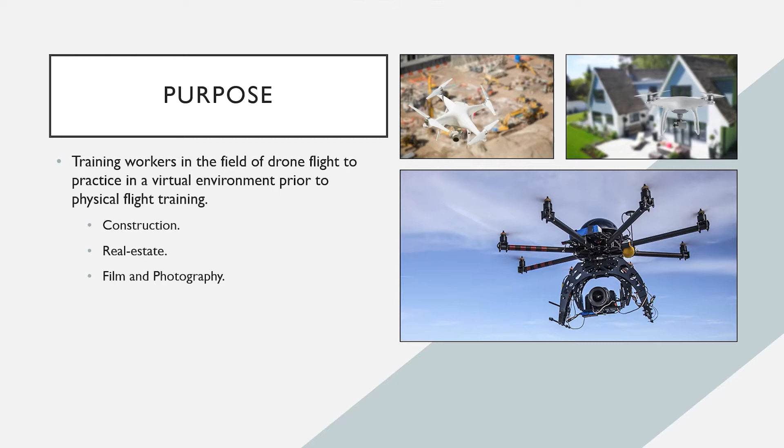So I developed the simulator within the Unity 3D physics engine. It's 100% physics-based, the drone. I wanted to make sure that it was programmed to be 100% physics-based, meaning within the engine there's no animation, no vector translations, it's not moving across coordinates through some type of system. It's using simulated forces and torque within the program itself. With that comes great results that happen on their own because it is all quote-unquote natural.

Having the drone move forward makes it lean forward as well, just as it would with a real-life drone, very minute, leaning back, same thing. This allows for things like front flips and back flips to happen naturally. You can see in the little GIF that the drone does this, and that wasn't something programmed into it specifically - that's just a result of it being physics-based.

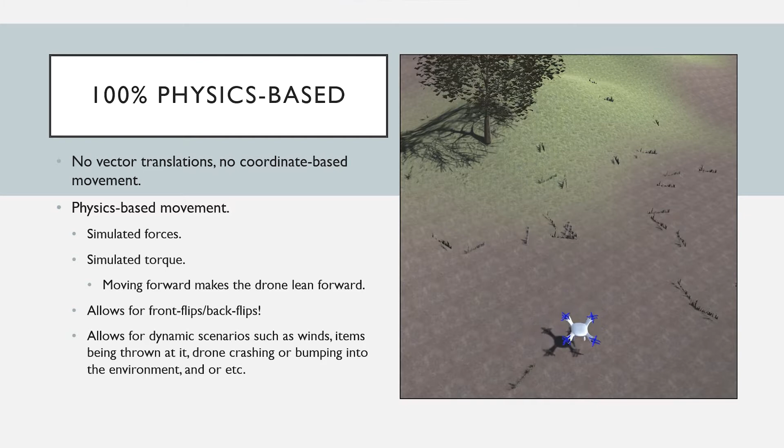It being physics-based allows for future dynamic scenarios such as wind forces. You could throw an item at it and it would react to it, get hit and get jerked and all that. It can crash, it bumps into the environment and such, and that brings us to the collision of the drone.

It can completely land, it can hit things, it can fall and crash, just as you would need in a simulator to show error. I wanted to make sure that the colliders for the drone weren't too intense, because physics simulators usually do require simplicity as much as you can optimize it to be. So there are 4 sphere colliders on the propellers, and 1 box collider on the main body of the drone, as you can tell in the photos. But there's the drone again, just trying to land and then falls off the roof.

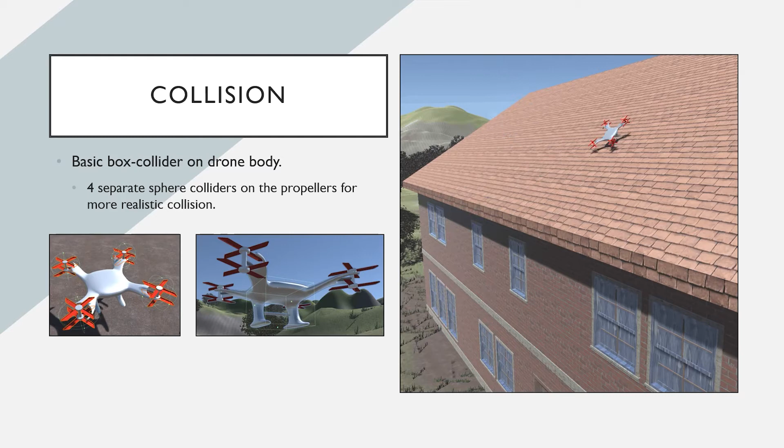And that brings us to self-balancing. That was an extremely important mechanic that was necessary for the training, because a majority of most modern drones, such as DJI and Phantom, have self-balancing in them. And it just makes it a more immersive experience, a more realistic simulator.

So though wind forces aren't implemented right now, that's something that should come down the line. This would combat that, and when you do lean, it catches itself, it's able to restabilize itself. The basic method is right there, like in the photo.

If we were to say that the drone was leaning one way, the program detects which propellers are leaning, and then compares it to the other opposite side of the drone and sees, okay, the front left and back left propellers are not at the same height as the front right and back right propellers. We need to counter that with some type of torque force.

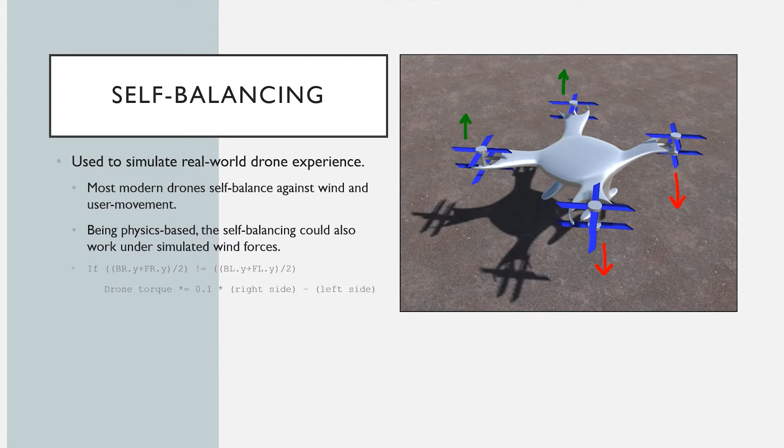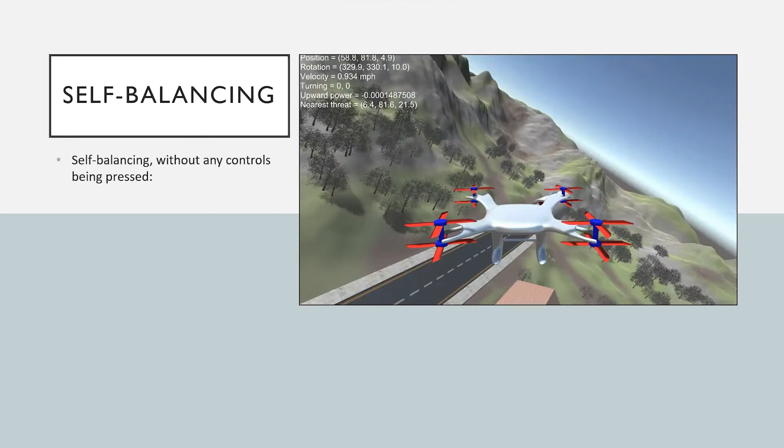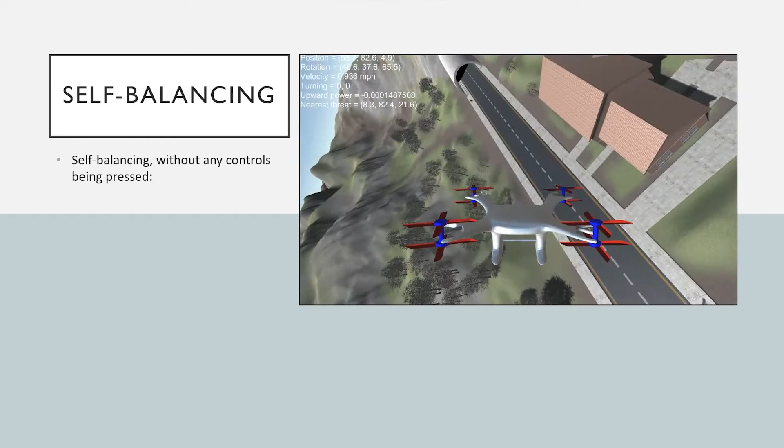So here's an example of the self-balancing, and this is without any buttons being pressed. This is completely letting go of the drone and it catching itself by itself, dynamically. You can see in the logs I added to the screen of the simulator, you can see all the calculations. It checks the rotation, position, velocity, and catches itself, bringing the velocity down. The upward power shows what the user is pushing down, and right there it's at 0 to show that the drone is just completely catching itself on its own.

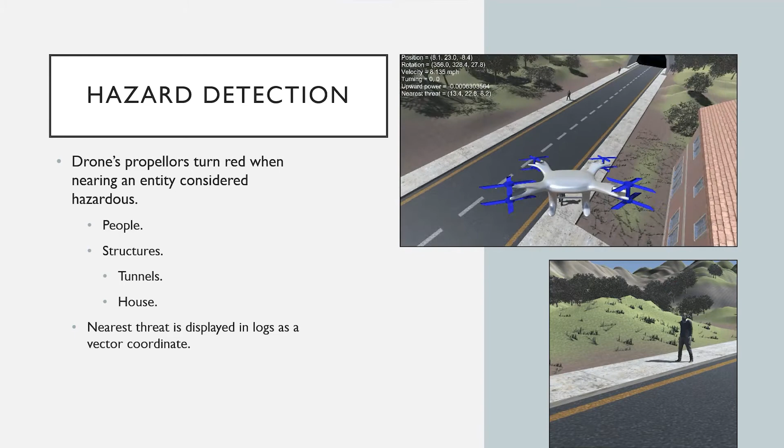And with that, if you saw in the logs, there's also nearest threat, which brings us to our next slide: hazard detection. So for a training simulator, you need to show how to learn, how to train yourself. With that, we have hazard detection, and hazards in the simulator are people, structures, and in the simulator that would be tunnels and the house. When the drone or the user gets too close to a hazard, the propellers become red to show you that you're too close to some type of entity. Back up, try to avoid whatever that may be.

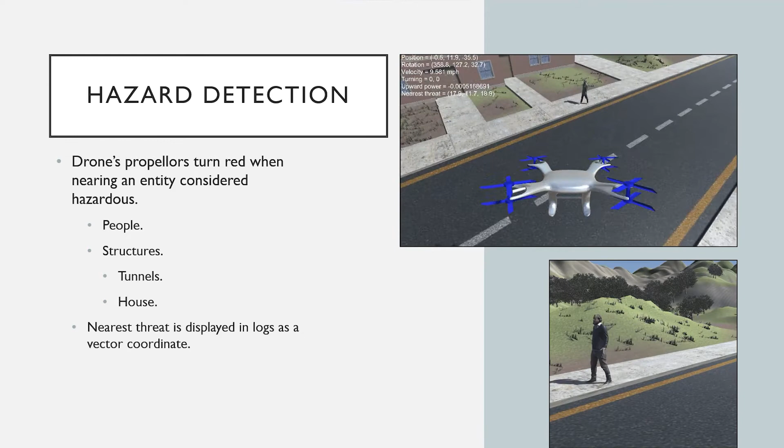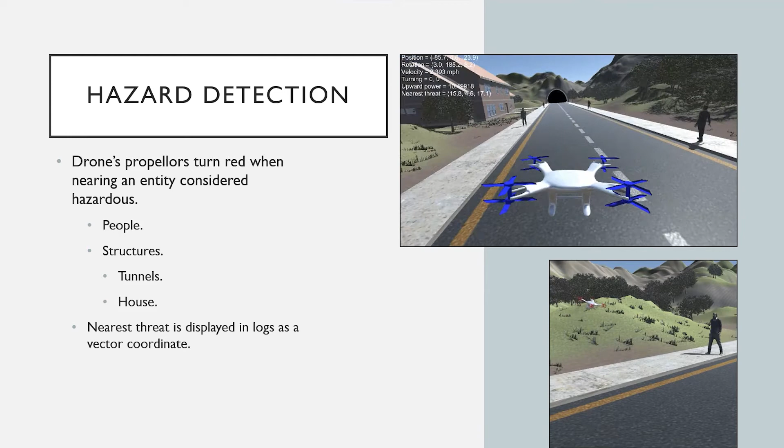You can see that in the logs as well. It says the nearest threat is at a certain distance. It finds the nearest threat in an array of threats, finds the closest one, and tells you how far away you are from it using a vector. As you can see, it gets closer and closer and the numbers go down.

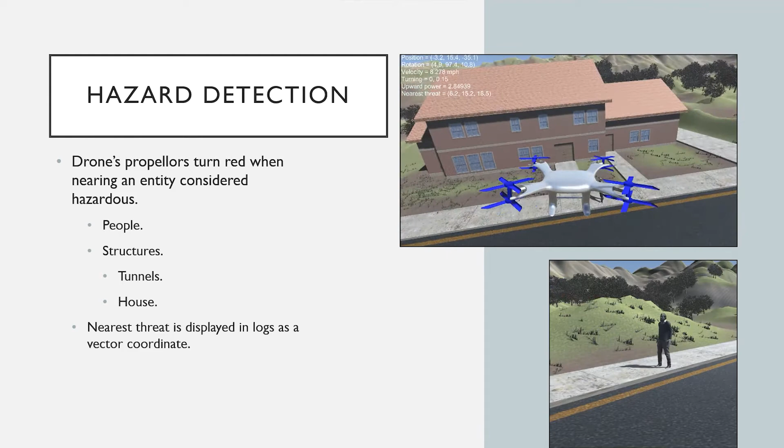With the people, I thought this would be funny. I wanted to show how the people are randomly generated. This is just an exaggerated visual to show them. I promise they're not self-aware, to my knowledge. The characters are randomly chosen, so you have a better immersive random experience. You don't have the exact same linear experience every single time.

They come out every 10 to 30 seconds, but this is every 5 to 10 seconds in this case, just to show it. This would also be implemented for vehicles and other things such as maybe birds or other types of animals in the future. This is, I would say, relatively early development, and so I want to have more road hazards like vehicles, wind forces, just more detail in general. I want to make sure though to keep it optimized.

Trees, those trees in the simulator were a lot of work. When you're close, they're much more detailed, and when they're super far away, they just disappear, just so it doesn't bring down the frame rate of the simulation.

Different training difficulties, that would be great. That's something I'll be working on real soon. Tasks and challenges, of course, this is a simulator. This is for jobs, we're not doing it just to fly around in a drone. This requires some type of task that maybe could be done.

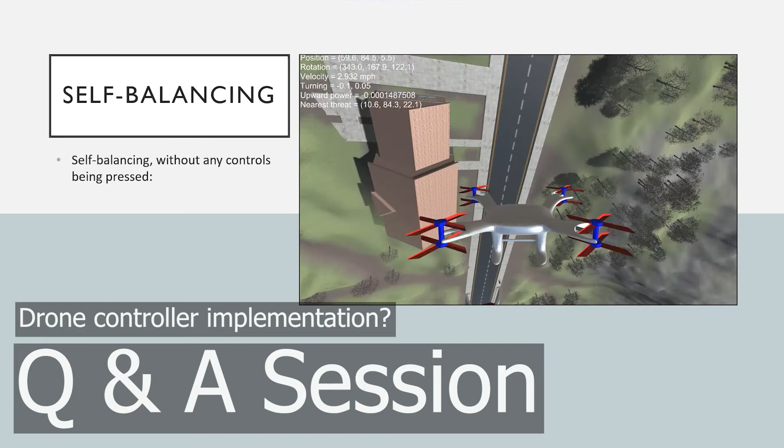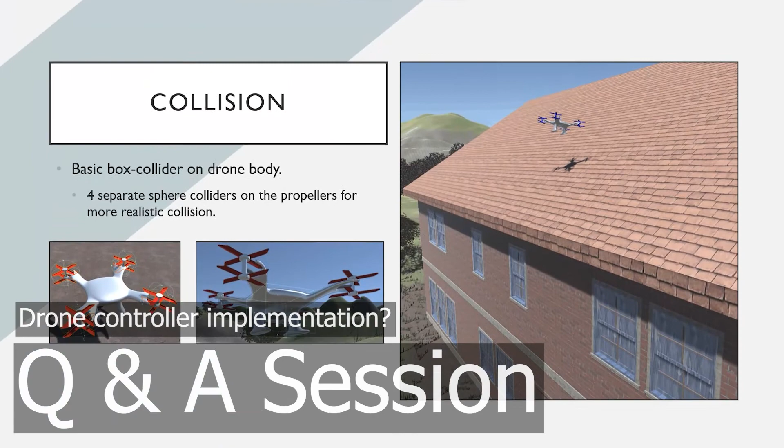What I wanted to ask, can you include a real remote to steer that? Yeah, if you're talking about an actual drone controller. Yes, an RF remote. I think they have USB these days, and you can hook them to the computer. Yeah, that was the next step we wanted to take, to real soon implement an actual controller. I have a Phantom drone in my closet, so I'll be able to possibly set that up real soon. That's definitely one of the nearest next steps.

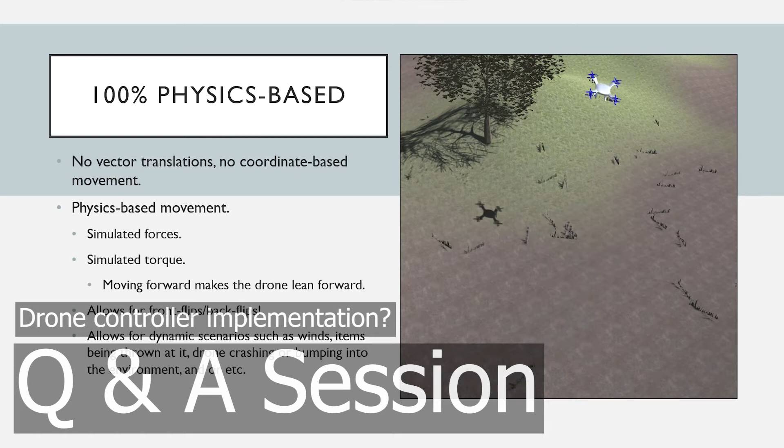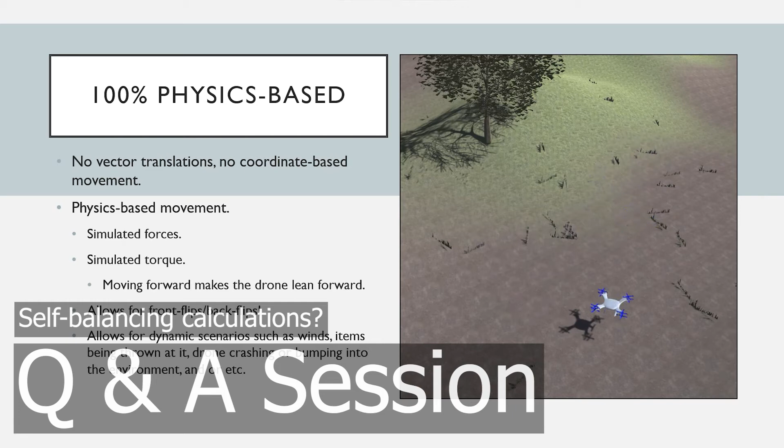Actually, the self-balancing, did you have to write the feedback type controller to get it to self-balance, or was there a library or something like that? I wouldn't consider, I don't think it was exactly a library that I got from anywhere. It was really, I guess I could say it's built in within Unity itself.

It will tell you the y-axis coordinates of the propellers, and that's how I detect it, like I was saying, it'll detect if the y-axis on a certain side of the drone is higher than the other. So now you know that the drone is not balanced.

So it counters that with a torque force to counter that. It does 1% or 10% of the right and left side difference, and then that's multiplied to the torque of the drone. It's kind of funny how I say that, because obviously you can't just add torque, but that's how you do it in the physics engine. You can just change the velocity and the torque of the drone, and even though that might not be exactly how it would work in real life, you definitely get a very realistic result.

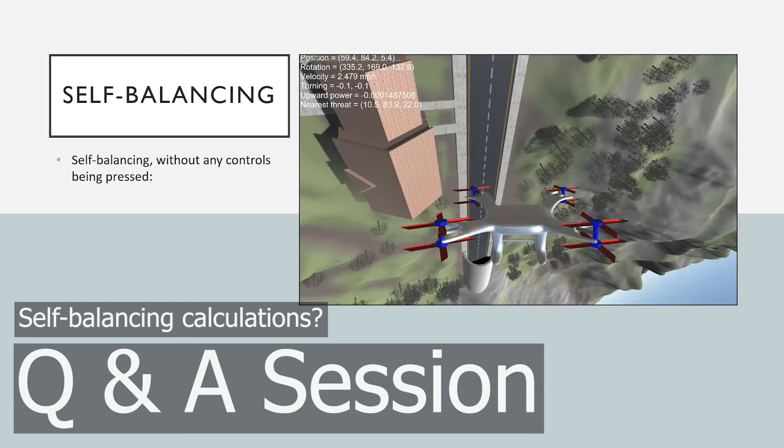It definitely feels like there's some type of mechanic within the drone that's making it self-balance. A better way could be to put upward forces on the propellers themselves, but instead the actual drone body is having the torque modified. Normally that's a very difficult area, because if you put too much torque and overcompensate, you actually increase the oscillations.

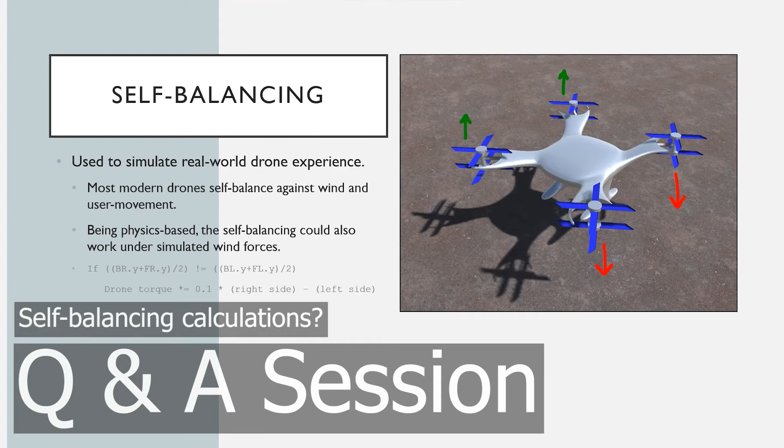Yeah, that was something I did have to deal with, because it would just start to get worse and worse, more intense every single time it tried to rebalance itself. So that's why it only does 10% of the difference, because it would be too much, it'd start flipping itself. With something like this, there's a lot of moving parts to it. It's a very complex type of program.

So what would you say was the most difficult part of nailing all this down?

Ironically, it's so funny you say that.

I would say probably the terrain and environment itself, because with that many trees and that many vertices, the simulator was lagging. The frame rate was super low, so I had to figure out how to have all these little grass PNGs on the ground.

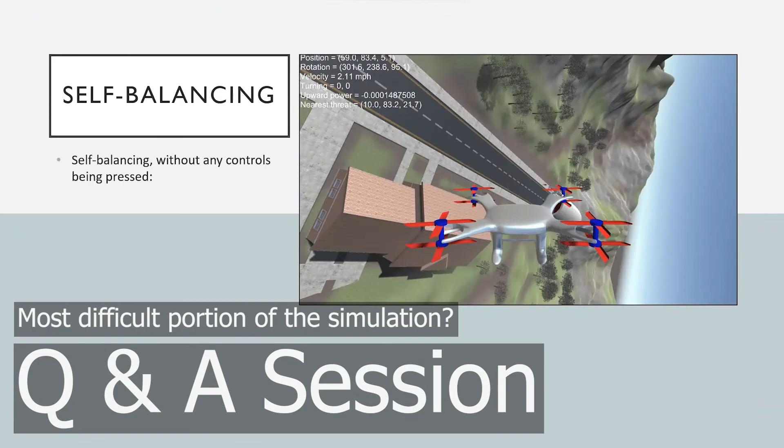How do I have all these trees in the same shot? I wonder if I can show you a better visual. Here we go, all those trees. You can see in the far back, the trees are just not there. When you get close to them, they appear.

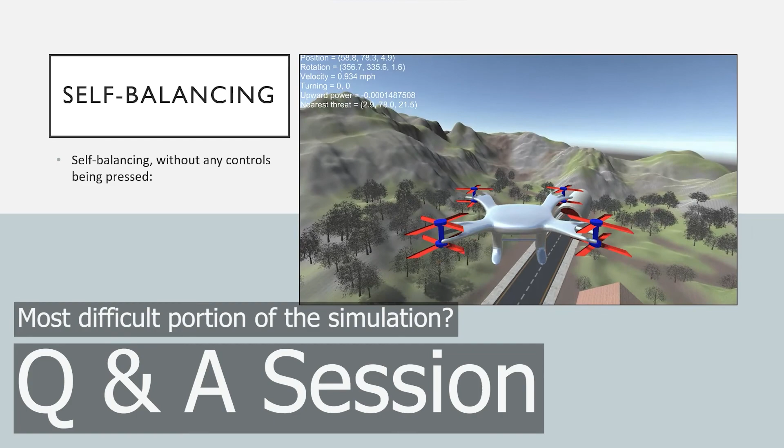So you have detail super close, and the further away it is, you lose that detail because it's not required. You can see the grass up close and far away—it's not there. You can actually see it disappear in this shot when you go far away on the hill.

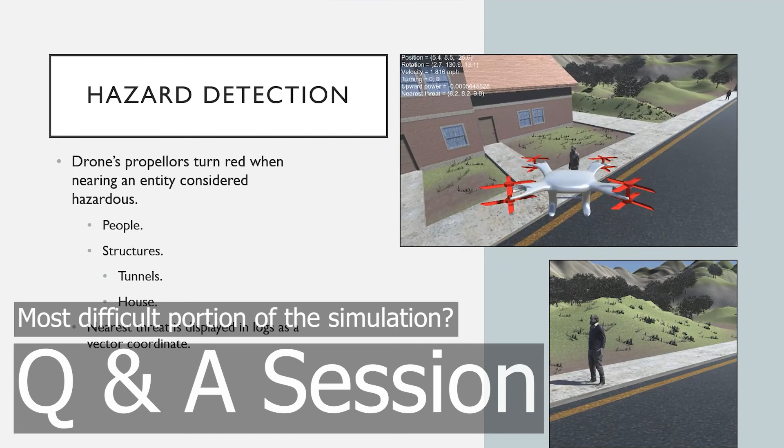So yeah, that was the hardest part for the whole thing, because it took a lot of optimizing. For the drone, the only animation is the propellers, just to have the immersive visual of them spinning to show that it's flying.

When it lands, the propellers stop. You can see that on the roof shot where it crashes—the propellers do indeed stop.

It might not show it in this clip, but yeah, you can kind of see the propellers stop when the controls are let go right there. You can also see the red hazard visuals detecting the roof, like, oh, something's wrong.

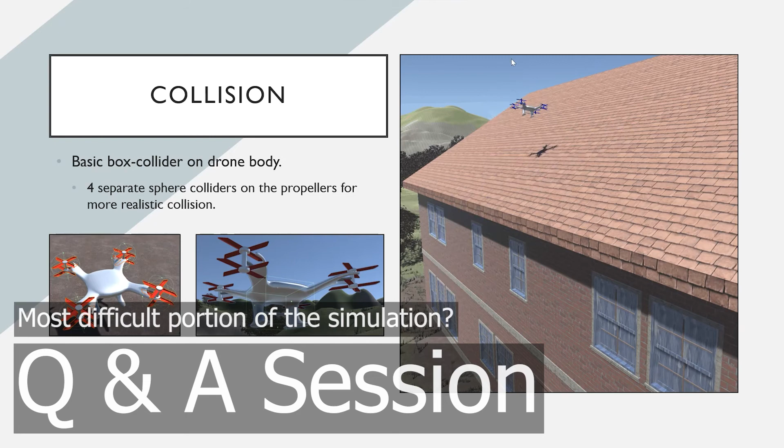I would think that given how many Unity simulations use an outdoor scene, you could just download one where it already does everything you're talking about—already done by somebody.

Yeah, I wanted to do it from scratch, because when I've done that before, I've run into issues—you just don't know everything about that entity itself.

I could probably have found a linear system for the people to walk along.

But then I'd have to figure out how to have the drone detect these hazards, and add collisions—there are collisions on the player, so if the drone were to hit the people, it would fall over, so I'd have to implement that.

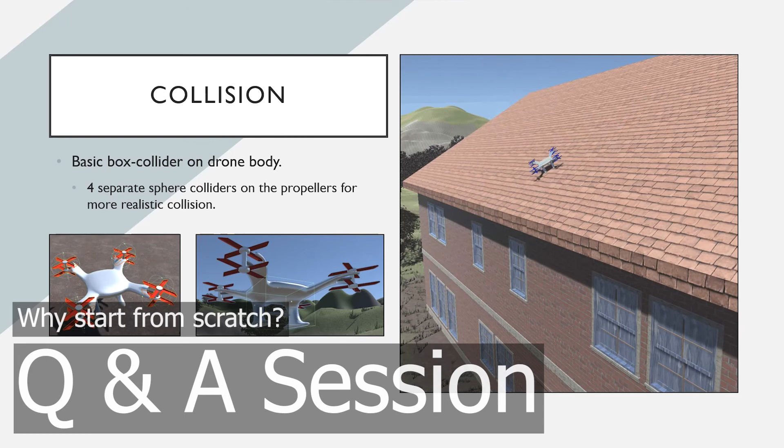And implement so many other things, so I just thought it's probably better if I start from scratch on essentially everything, so I fully know 100% how everything's working.

So what are your future research ideas on that?

At the moment, I haven't really had that on my mind. Right now it's probably been more about development, trying to get it done, rather than worrying about showing this to people or reaching out.

Right now I'm trying to get it done, trying to have something developed. I want to make sure I have a quality product—not that I didn't want to do this, I'm glad I'm getting to present it to you all.

It's definitely still early in development, and I wish I could have had several more months to work on it before showing you guys. But I think it's at a good enough stage that I can show the basic version that's out right now. For anything else, I would love to start.

How to structure research—so you train 10 people on the simulator, and give 10 people a drone right in the hand. Right, yeah, that would be it.

I definitely need to make the tasks real soon, to be able to start having people do certain tasks within the program. Because right now it's just you fly around and try not to hit people, and that's about it.

I'd love to have people train within the program, but it'd be tough, because you want people who don't train with it to possibly have issues with a real life drone, which could cause repercussions, costs, and damages—so that could get expensive.